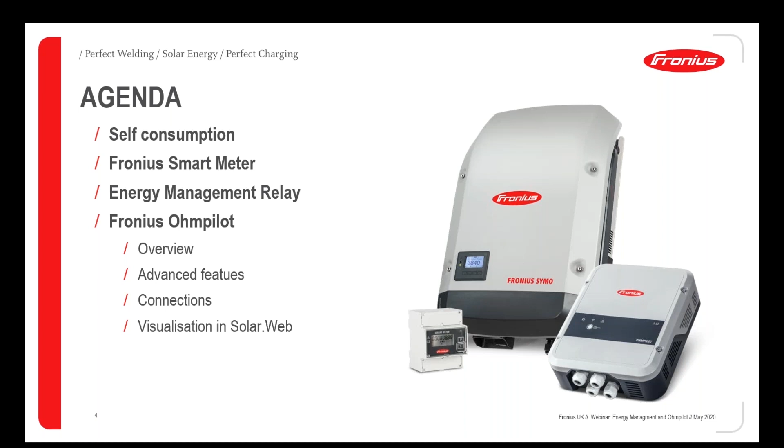So if we have a quick look at the agenda for today, we'll start off by looking at self-consumption, what it is and why it's important now in PV systems. We'll then look at the Fronius smart meter and the various models of those that are already out in the market and being released later this year. We'll then look at the energy management relay and the Fronius Ohmpilot, which can be used for improving the amount of energy you use within your own building.

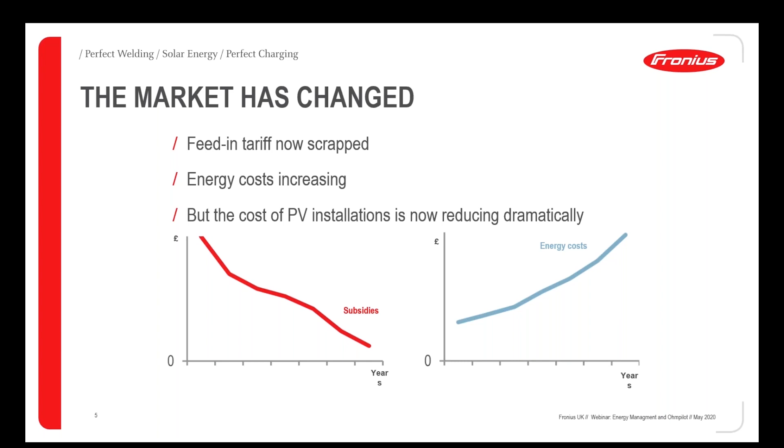So over the past few years, as many of you will know, the solar market has changed. We used to have very high feed-in tariffs, which meant that you got paid for the energy you generated, whether you used it yourself or whether it was fed back to the grid. Those have now been scrapped. However, the cost of electricity is still increasing, and the cost of PV system installation is getting lower and lower. So it still makes a lot of sense to install PV, but instead of before where you were just looking to generate as much as you possibly could, the key thing now is to consume as much of that energy as possible within your own building.

There are various different ways that we use electricity. Obviously, just the general loads from things like lighting, heating systems, watching a TV. But you can also look at other systems that can be programmed and controlled during the day to improve your energy consumption. So for example, you can install an inverter with a battery system. That is something we'll discuss at a later date in future webinars. But today we're going to have a look at switchable supplies, so things like hot water heating and other loads like EV chargers.

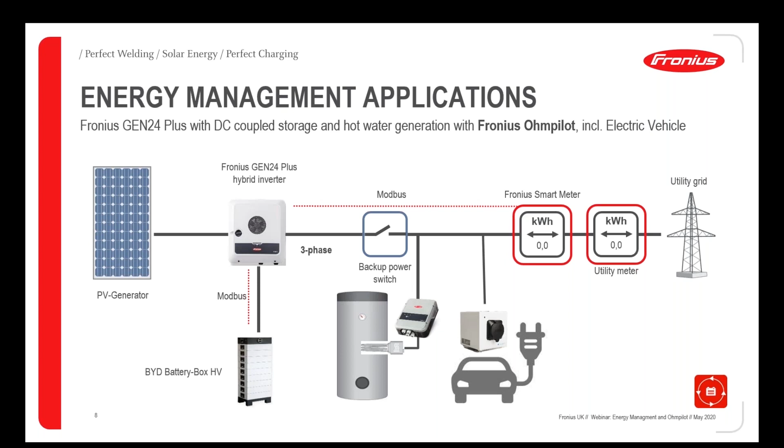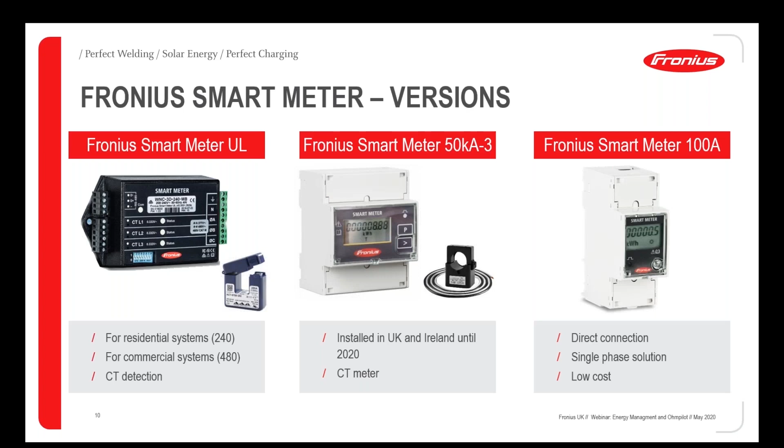For all of our solutions, we require the Fronius smart meter. As I just mentioned, there are a number of different units on the market. At the moment, the most common unit will be the Fronius Smart Meter UL, which is the black unit you see on the screen. These units come in two versions, the 240, which is for single-phase installations, and the 480, which is for three-phase commercial systems. Both units require CT detection, so whether it be one or three-phase, you'll need one or three CTs.

Some of you may be familiar with the Fronius Smart Meter 50kA. This unit was used up until 2020 and also requires CT connections. These units came as a single option, and you just fit one, two, or three CTs depending on the type of installation you're connecting to. However, these have now been replaced with the Fronius Smart Meter UL.

Another very important device which comes out very soon is the Fronius Smart Meter 100 amps. So this is a single phase meter designed specifically for the domestic market in the UK. It has a 100 amp supply rating and it has 25 millimeter terminals, so you can fit it directly into your main consumer board. Big advantage of this is it's a much cheaper unit to purchase, and also you don't need to have the additional CTs, so it's easier to fit into a small consumer unit.

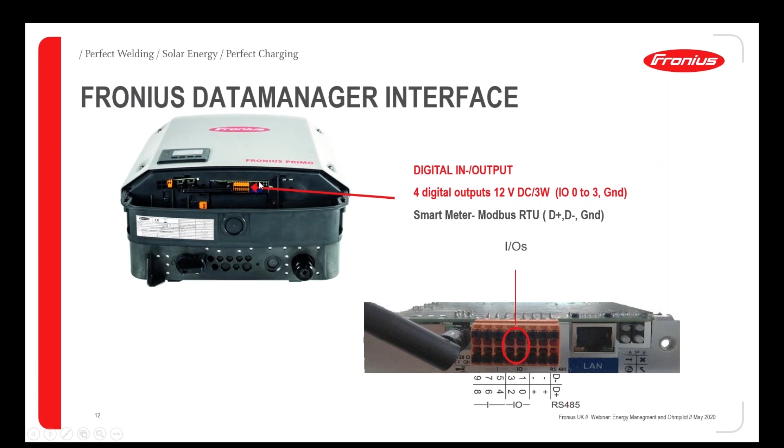So you have a very wide range of devices that can be controlled directly from the inverter. That can be electrical vehicle charging, it can be hot water immersion heaters, pool pumps quite often, and air conditioning units. But it's not limited to those options. Anything where you can switch on and switch off a load as a step load can be controlled by the energy management relay.

And it's a very simple physical connection. We have the smart meter connecting into the Datamanager card on the Data Plus and Data Minus terminals. We then use the I/O controls up to 4 digital outputs, so we can control up to 4 different relays. We simply connect into the relay, supply that 12-volt signal, and then that closes the relay and supplies power to your load. It's a very, very simple solution, and it's, as I say, available with any inverter which has a Datamanager installed.

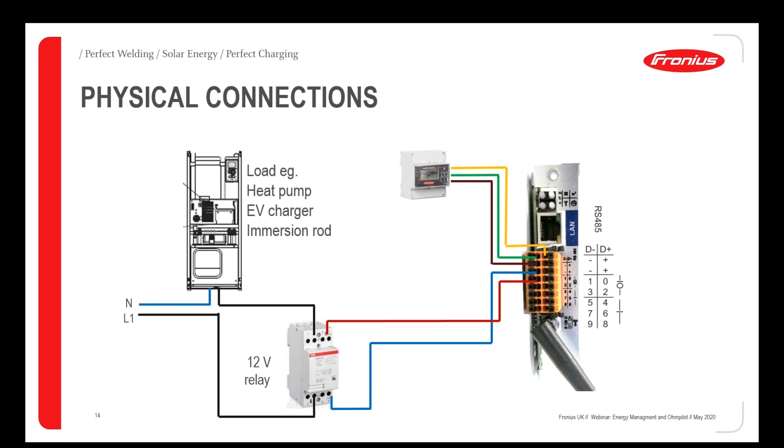Once you've made those physical connections, you can go into the Datamanager embedded browser, and you can set the controlling parameters. So typically, you'll be looking at a system where you want to switch on that load when you have surplus power. So that's when you have energy feeding back to the grid. So selecting that option, you can then set the thresholds. So when you switch on that device, for example, if you're feeding 1,000 watts back to the grid and you have a 1,000-watt load, set that switching on as your threshold.

And then when you start to consume from the grid, so when there's other loads coming in within the building or the clouds come over and you start to draw energy from the grid, you can tell the units to switch off and open that relay so that no energy is used.

You can then set the minimum and maximum durations during the day. And this is really useful if you have something like a pool pump, which only needs to be run for very short lengths of time. You can set that as a maximum, say, of 60 minutes. And also per signal, the minimum term can be set as just 1 or 2 minutes. So it's just a short blast of a heater, or it can be put on for a longer period if it's something that you need to have a good long period of usage from.

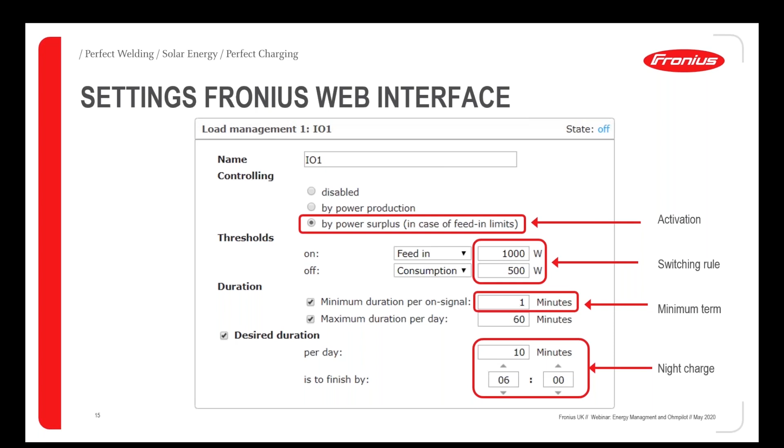Finally, you can set a night charge system. So a good example of this is if you have an EV charger and you want it to charge on an economy 7 low overnight tariff. You can simply state a period of time, so maybe 10 minutes, maybe 4 hours, and you can tell it to have that charging completed by a certain time of day. So for example, by 6 a.m., which may be the end of your lower overnight tariff. That means that you can get the required amount of charge into your EV charger and have the car ready to go for when you're heading off in the morning.

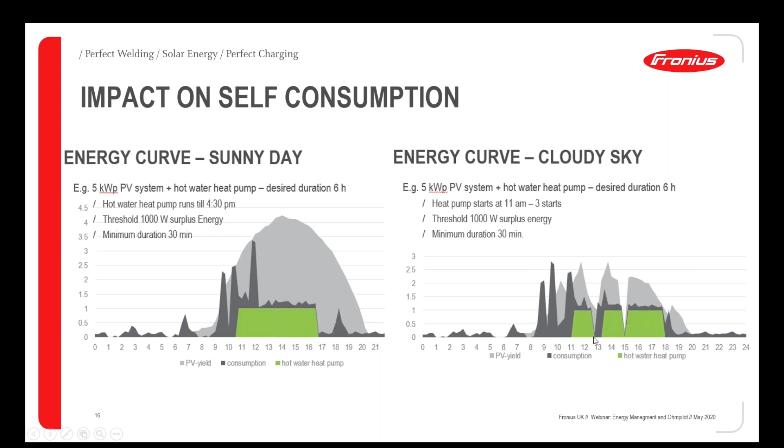The Fronius Ohmpilot takes that one step further forward. So what we've seen so far is a single step on-off. So if you have a 3 kilowatt immersion heater, you're going to really need to have 3 kilowatts of export before it makes sense, because otherwise switching on a 3 kilowatt immersion when you have less than 3 kilowatts of export means you're going to be demanding electricity from the grid. The Ohmpilot's benefit is it's a stepless immersion or hot water supply. So it means that if you only have 500 watts of excess, only 500 watts of load is put through that immersion heater.

So let's have a look at the benefits. As I say, it's a stepless single phase option up to 3 kilowatts. So connected to the inverter, you're able to modulate that output and that supply to the immersion up to 3 kilowatts. But if you have a 3-phase installation and a 3-phase immersion, you can actually install up to 9 kilowatts of immersion heating with this one device, which makes it a very cost-effective solution on commercial installations.

It works with export limitation. So if you've already got a 0 export limit on your site, this will work as well with that device. So it means that you can get more generation out of your inverter. So whereas an inverter would normally be sat at the export limit, this will enable you to put up to another 3 kilowatts output from your inverter into a hot water system.

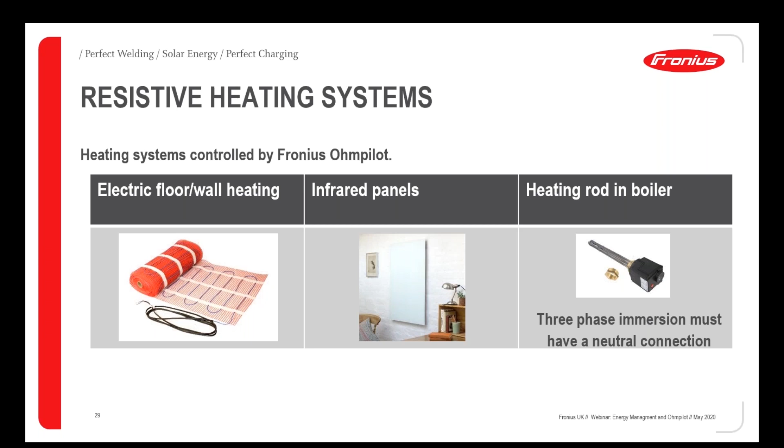So we have a quick look at how the hot water preparation takes place and the logic behind it. If you have a domestic installation with 1500 watts generation from the inverter, you may be seeing about 1 kilowatt of that being used within the building. So for your lighting, your washing machine, whatever it may be. And you're going to have about 500 watts going back to the grid, and that's going to be read by the smart meter. So as soon as the smart meter sees that export, it's talking with the inverter, and then the inverter is talking with the Ohmpilot.

And as a result, that 500 watts of surplus is diverted to the Ohmpilot. So we see nothing going back to the grid now, and instead we see that 500 watts of additional energy being used within the building to heat the hot water.

But then as the sun comes out, the sky's clear, you may see an increase in generation from your inverter. So we might now be up to 5 kilowatts. And that means that the Ohmpilot can increase its output up to the maximum for a single phase, which is 3,000 watts. We still get that 1,000 watts load within the building. So it means there is now some surplus that's going back to the grid.

So on a single phase like this, you could then be looking at potentially installing a battery if you've still got a lot of exports back to the grid, or setting up an energy management relay as well from the inverter to boost the load even further.

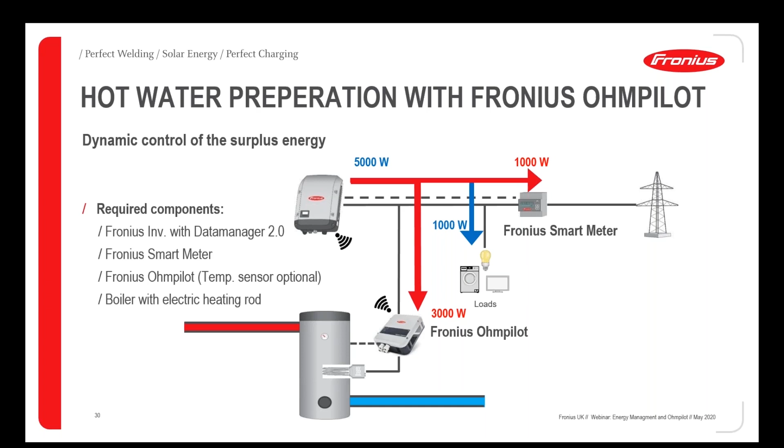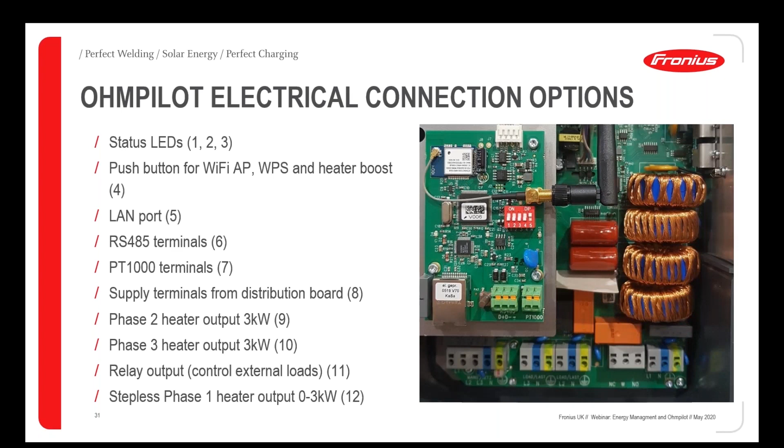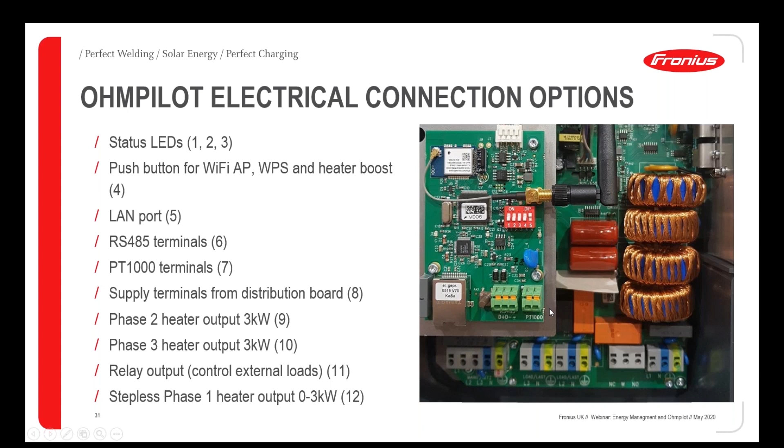If we zoom in on that, you can see on the communications board we have various connection options, which are clearer if we have a look at the schematic. So if we look at it as a schematic, we can see we have 3 status LEDs. We have the power, the Wi-Fi status, and an error code there, 1, 2, and 3.

Number 4 is the boost button that we mentioned before for boosting the energy that's being used to heat hot water. It's also used to open the Wi-Fi access point for setting up the device. Number 5 is a LAN port, so that's an RJ45 connection, so you can connect straight to your router. Number 6 is an RS485 connection.

So you have 3 different communication options here. You've got the Wi-Fi, which is shown by the blue flashing light, number 2. You have the LAN connection, number 5. And if you don't have an easy route back to your router, you can connect to the Datamanager or to the smart meter through the RS485. You then also have the PT1000. So that's the temperature sensor, which is simply connected onto terminals number 7.

Below that, on the backboard, we have the incoming supply terminals from your distribution board. So this is 1, 2, 3 phase system that feeds in directly from your circuit breaker. Number 9 and number 10 are the second and third phase connections. So if you're having a 2 or 3 phase supply, these are the outputs to the immersions. Number 11 is the relay output. So this is if you're connecting to an external device like a gas boiler, and it means that you can switch on, switch off that gas boiler from this relay.

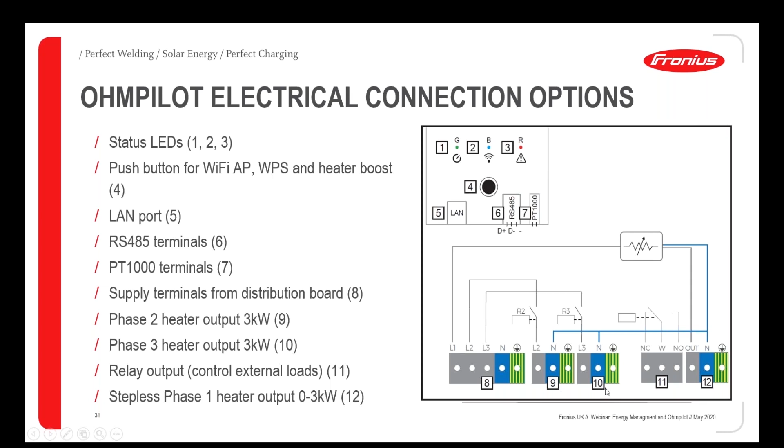In the connection area, as I just mentioned, you have the RJ45, you have the Wi-Fi connection, and we have the Modbus option as well. If you go with the Modbus option, you do need to set the dip switches on the board. So we need to have a termination resistor, which needs to be switched on, and then we need to give the device a Modbus ID as well.

Some people ask, what's the best way to connect? Well, the easiest way is to use Wi-Fi, obviously. You have a WPS option there, so 3 presses of the boost button and then a press of the router WPS button means that they should be able to automatically detect. So most of the time, that is the best option. However, if you've got a long distance or there's a poor signal to your Wi-Fi, you may choose to use the LAN option instead.

Alternatively, if you're retrofitting to an existing installation and you have the inverter a long way from the router, but very close to the Ohmpilot, you may just want to use that local connection with the RS485. So you've got a number of different options there to get the communications to work between the various devices.

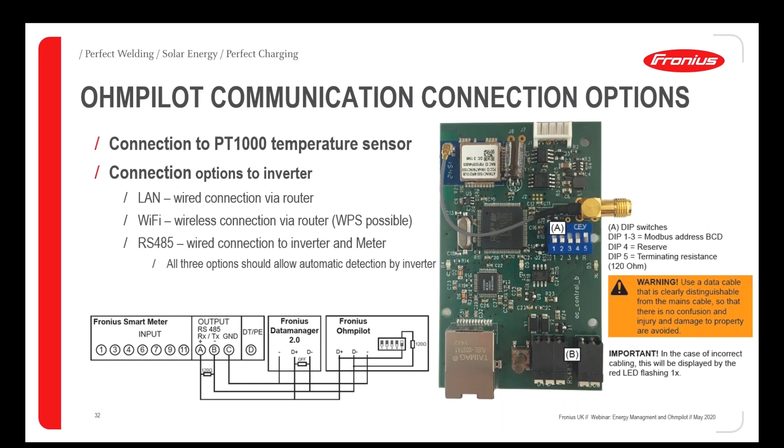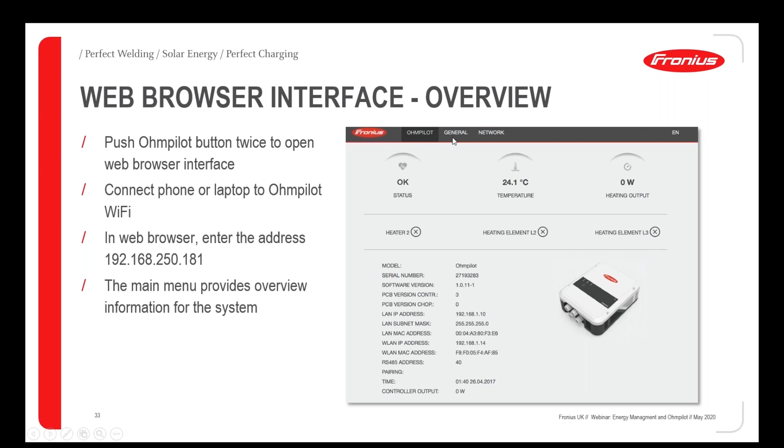If you click on the General tab, you'll then be able to see some more details. So most of the time, you'll be using automatic mode, which means that the device simply detects the load that it can put through the immersion. It means that it will automatically set up to divert all excess energy through into the Ohmpilot. But you do also have the option of manual connection.

And that means that you can set up a maximum load for the system, and you can also set temperature sensors. So you can control the actual temperature of the water, and you can set time of day requirements, temperature requirements for the device. So you can make sure that you've got hot water first thing in the morning. You can make sure that when you get home from work, the water's back up to temperature where you want it. You can set the maximum temperature, of course, and also we have the option of Legionella prevention.

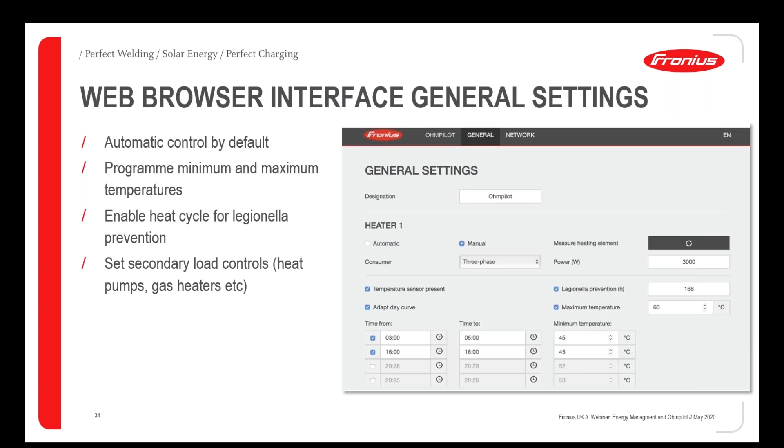And this is a very useful option. If during the winter you have very poor weather and there's no surplus energy available, you can still set this maybe once a week to switch on, heat the water through the cylinder, and kill any Legionella bacteria that may be present. So as I just mentioned, if you have the temperature sensor, you can adapt the day curve. You can set the temperature requirements at different times of day.

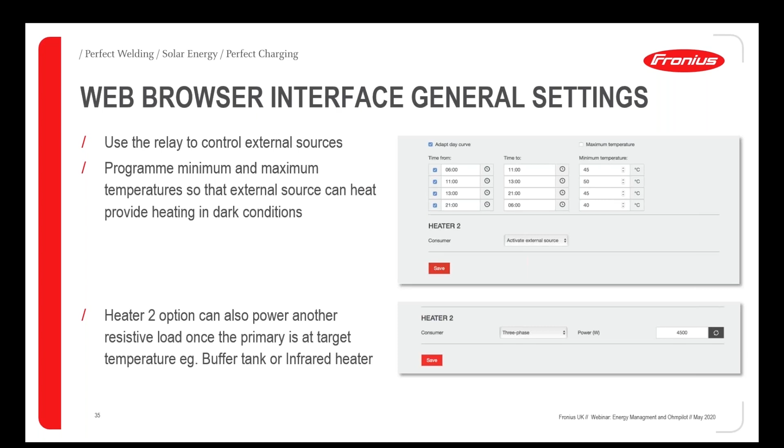You can also include a second heater. So this could be an external unit, just like with the energy management relay. So you can switch on that external device. You can also use it to switch on something like an air source heat pump or a gas central heating system. So this shows that you've got a number of different options. You can really get into a lot of detail with the Ohmpilot. It's a lot more than just switching on and switching off a relay.

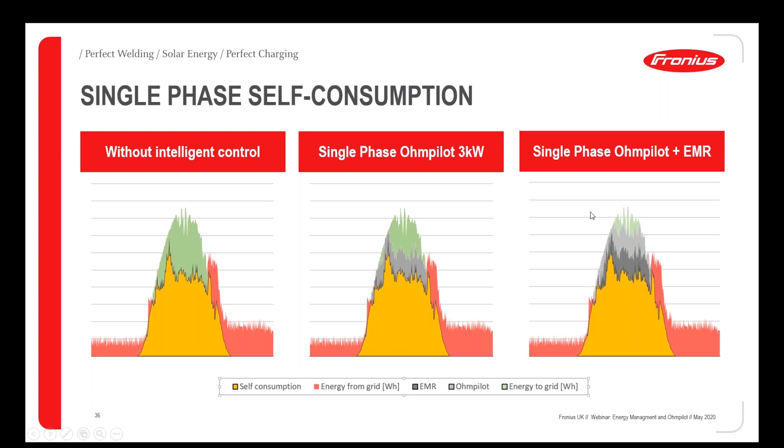If we have an energy management relay and an Ohmpilot, we can start using more energy early in the day when we've got enough to use in the Ohmpilot, but where it's not quite enough to reach the threshold of the energy management relay. We still have a little bit of feed-in back to the grid in this instance. So for us, the best option is to have a 3-phase Ohmpilot.

If we have a three-phase Ohmpilot, we're now able to use all of the energy that we produce during the day. There is a tiny amount of feed-in in the early afternoon, but the vast majority of that energy is now used all day long. And because we have that stepless load option with the Ohmpilot, it means even early in the day when there may be just a few hundred watts available, that's all going back into the hot water tank.

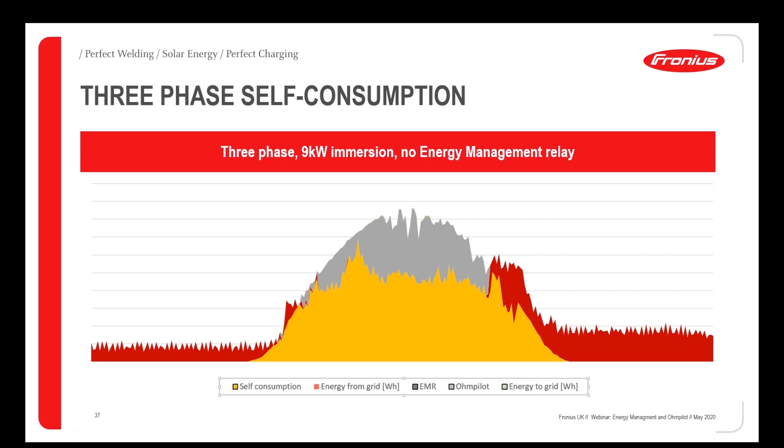So there's a lot of data being produced here, and it's good that within SolarWeb we can actually see what's happening with our systems. Before we even install an Ohmpilot, it's worth actually seeing if the customer will benefit. So we have a simulation tool that's built in. If a customer already has a PV system with a smart meter, they can run this simulation on the SolarWeb website.

Over the winter months, of course, in the UK, we're not going to see great deals of sunshine in the deepest, darkest winter. So then we're still using a fair bit of energy from the grid and from the gas system in this instance. But you can at least get a really good idea here of the potential benefit of installing an Ohmpilot.

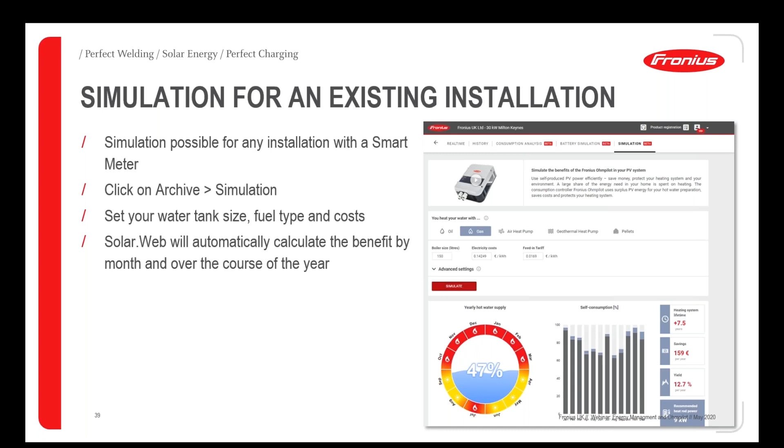And it's a good sales tool for you to go back to your customer maybe a year after the installation and suggest an upgrade to their system. It gives you some good detailed numbers that you can go back to. So once you've shown that there's a benefit from the simulation, you can install the unit, and we'll actually see some new data appear in SolarWeb.

So for example, on this installation, we have 8 kilowatts of consumption on site, and the Ohmpilot is currently supplying 3.1 kilowatts. So that's all coming from the PV system, and so we only have 1.4 kilowatts going back to the grid. You can also then see the energy balance for today. And this is again a very interesting view.

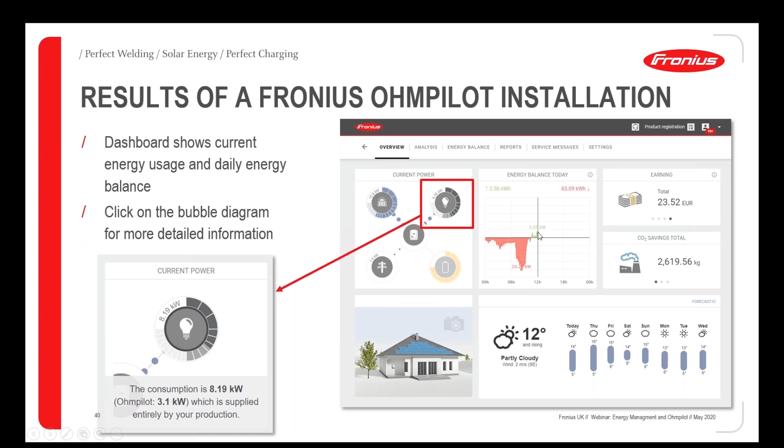You'll see in red where you're receiving energy from the grid, and you'll see in green where it's feeding into the grid. And if you click on that, you can then see a breakdown of your energy over the course of the day. And if you have the Ohmpilot with the temperature sensor installed, you can also see the temperature of that water in the tank. So you'll see overnight it slightly reduces, cooling down,

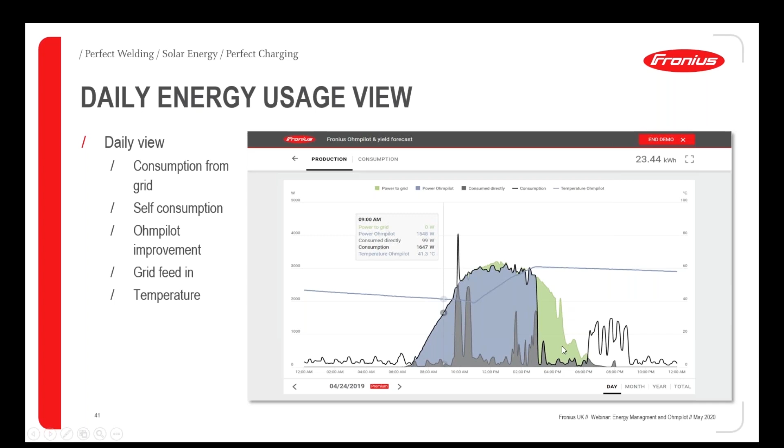but then as soon as the Ohmpilot's coming in and we have a significant amount of additional heating, the water temperature increases. It then reaches 60, which was set as the maximum temperature of the device, and the Ohmpilot is able to switch off then. Once it switches off, obviously we're seeing some feed into the grid, and that will continue on. But if you then required some hot water, the temperature drops in the cylinder, the Ohmpilot will be able to switch back on and take more of that energy again.

Over the course of the year, you'll actually be able to assess what you've done each month with the device. And obviously you'd expect to see the best performance of this over the summer months when you've got the most sunlight. That means potentially you could be switching off your fossil fuel heating system for a number of months. If you're not using it for heating and you're not needing to use it for hot water, there are significant benefits from having the Ohmpilot. But we still see a fair amount of additional consumption even in winter months here.

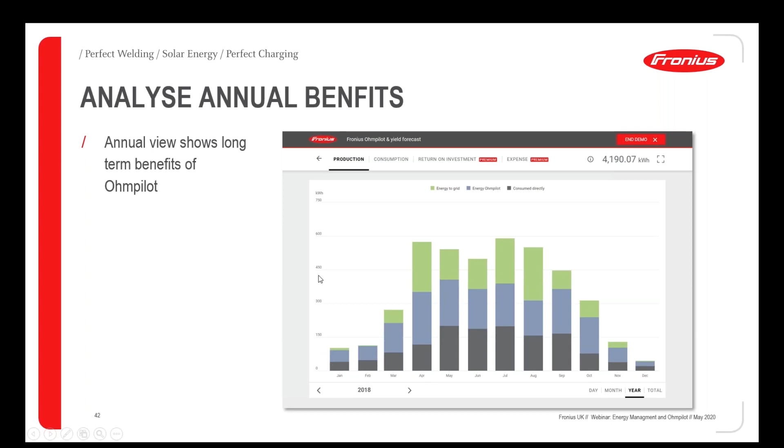So just to summarize what we've seen today, the focus is very much now on self-consumption within a PV system. The lack of a feed-in tariff means that all of the savings now come from reducing your requirements from your utility providers. The smart meter is a really important part of this, whether alone just for monitoring and analysing your usage, or if it's being used with the energy management relay, a battery, or the Ohmpilot. It identifies savings, it helps you to monitor what's happening, and then it also controls those additional units.

The energy management relay is a basic stepped control system which is available in any inverter with a Datamanager, with up to 4 loads available, and it's stepped, so it means you don't have that fine adjustment, but it can be controlled for various different devices, whether that be a resistive load, whether it be a motor or another device. And that, remember, is free within every Fronius Datamanager or Fronius full version inverter.

And then finally, we've looked at the Fronius Ohmpilot, which provides that stepless control up to 9 kilowatts on a 3-phase installation or 3 kilowatts on a single-phase installation. That can be used in conjunction with all the other devices we've seen today. It means that you can build up complex systems, or you can keep it very simple using it in automatic mode, just plug and play.